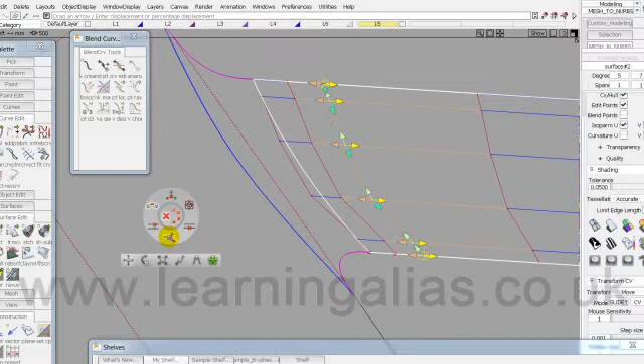Okay, now I want to put some acceleration in, so I'm going to pick CV and Hull, and perhaps a little bit of mouse sensitivity, about 25. There's two CVs there, so I'm going to pick them both and just ease them out. So I'm creating a bit of acceleration here. And how do I know how much acceleration I need? Well, I'm looking at this blend curve here.

You always want the peak of the blend to be in the center of the blend. So if I go like to there, obviously the peak is down here now. And you can see that I'm losing tangency there, so I have to correct that in a moment.

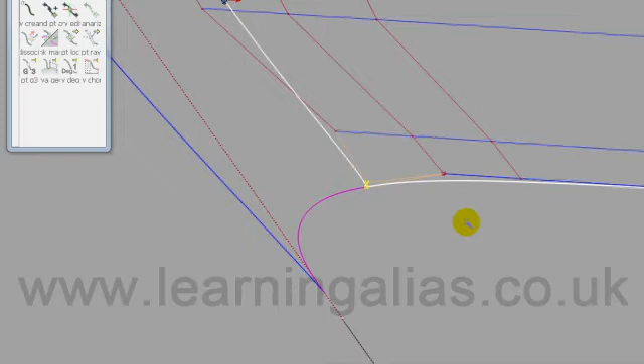So I think that's about it. That's about what I need. And I need something here. Shift E.

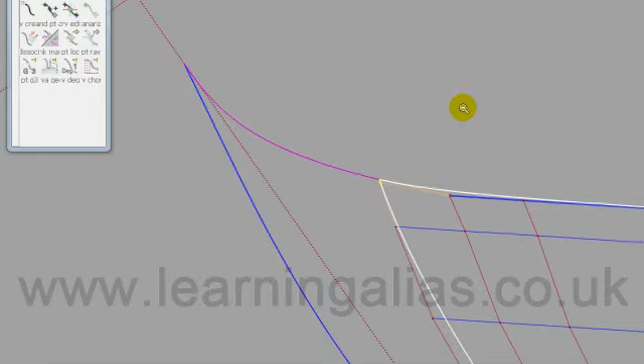So I'm looking for a nice line through there for my blend. That encourages the blend to build in the right direction and not sink in.

So I'm going to go into F8, and I want a little tiny bit of, I'm going to put some shading on so that you can see a little bit better what we're working on.

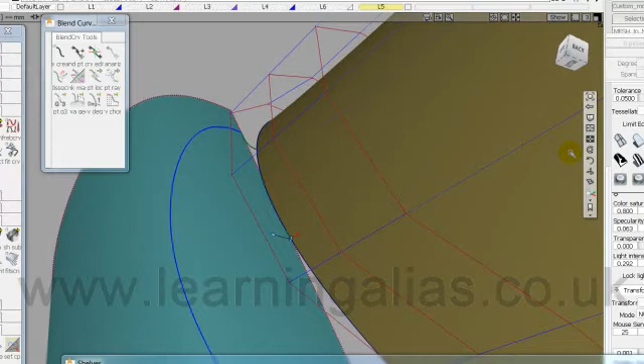And I'm going to come out of perspective just for a moment. It's easier to move the model around with some control.

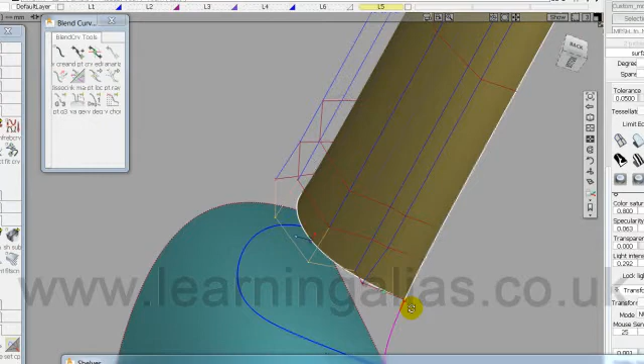So I've moved those two CVs, so it's this one here now that I want to move. Just a tiny little bit, not too far. And these at the side, just a tiny little bit. And that one there you can see is now tucked inside, and I'm looking down here to kind of get a nice smooth progression on my CVs.

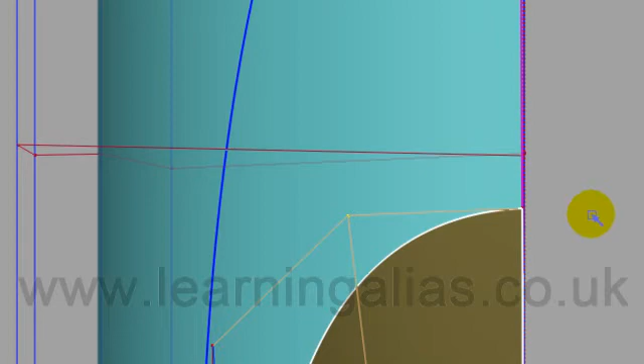I want to go back now and check the tangency at this point here and toggle set the construction plane, go into F5. So we pick this CV, hold down the control key, come over here and right click to adjust the tangency. You can work in two views if you want, but because I'm filming I have quite a small screen, so I'm sticking to one view.

I think that the gap here may be a bit larger than we need to build a good blend. So what I'm going to do now is pick the surface and just simply move that in very, very carefully. And we don't have to worry about the blend curves because they update. If you are unable to move that because it's a critical part and you don't want to change its position, then obviously you have to use the extend with merge on there.

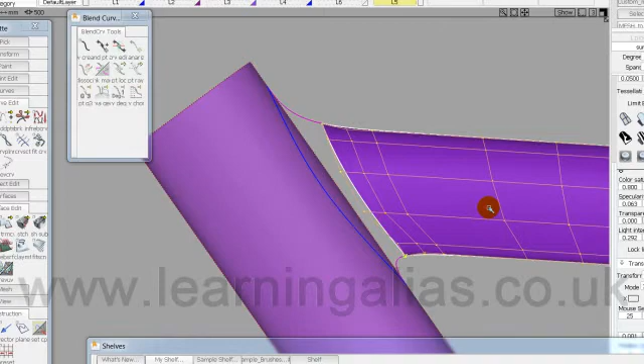I'm going to try that, and if it doesn't build properly we can move it out again, it's no problem. And I want to check for curvature now.

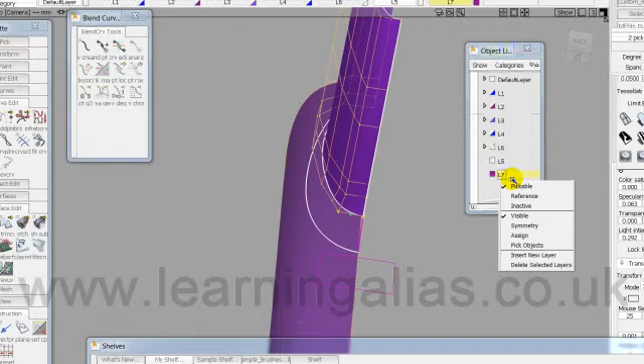So what I'm going to do is assign these two surfaces to a layer, Control L for a new layer. This colour here signifies to me that it's a surface, and royal blue signifies to me that it's curves, and then obviously when I've got more time I put the name on the layers. Turn on layer symmetry, and we're going to check now to see if we've got any continuity.

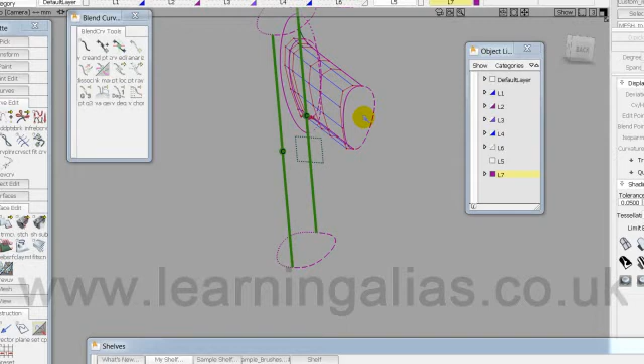Okay, we've got mixed results there. We've got curvature on that surface, so what I'm going to do now is hide unselected. So E on the keyboard, pick nothing, pick the surface, and then Shift H, which will hide unselected.

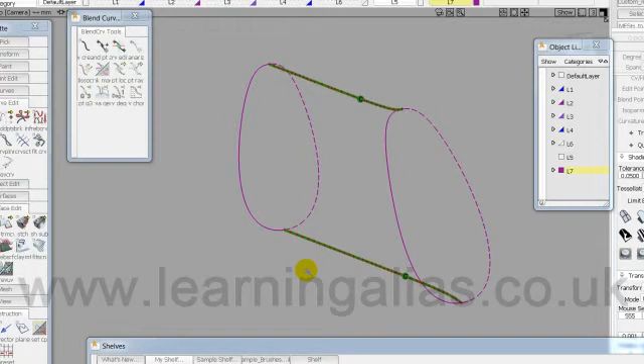The reason I'm going for curvature here now is so that once I've built the blend I don't have to mess around with this anymore, because if I do, once I've got the blend in place, the blend's got direct history and uses a lot of processor each time you move anything related to the blend.

So let's evaluate this. We'll put on some showroom, which is just the first quick look, make sure it looks alright. You see the lead-in that we've created there? It's not so much here, and it's more and more as we get there. In fact, it looks like too much there.

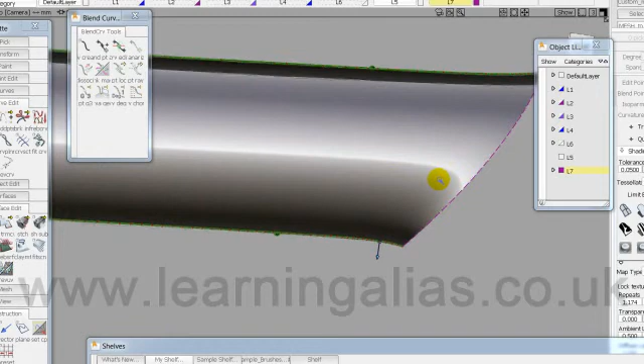Apart from that, it looks okay. I'm going to delete the locator. I can just hit G on my keyboard, which toggles the locator off, and hit G again to toggle it back on, so that's a useful hotkey. I'm going to toggle the model so I can better see the shading. It looks very good, doesn't it?

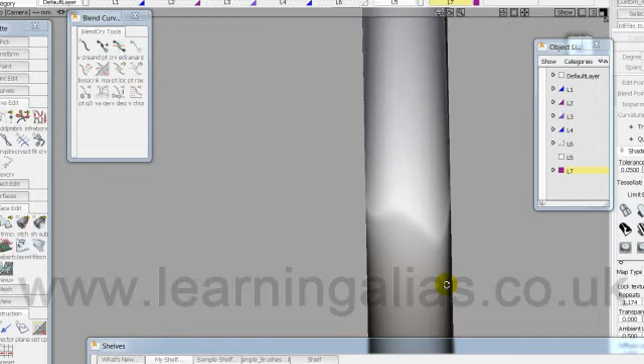But let's just check it with the all-telling zebra. Yeah, that's fine, we've got curvature there. Let's look at the other side, and we've got curvature there too. That's fine, okay, Control N to bring back the model.

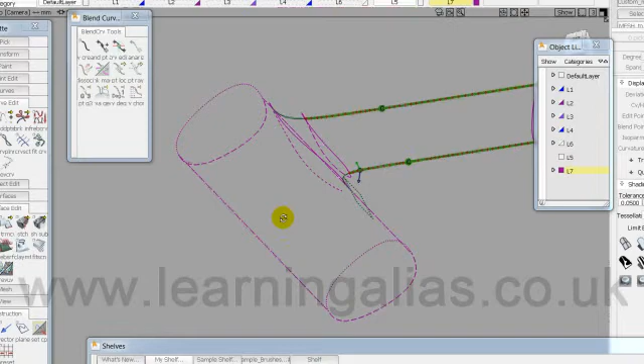And we're ready to build another blend now and see if things have improved. So I think what I'll do is trim this out here. Shift T. We'll turn off layer symmetry.

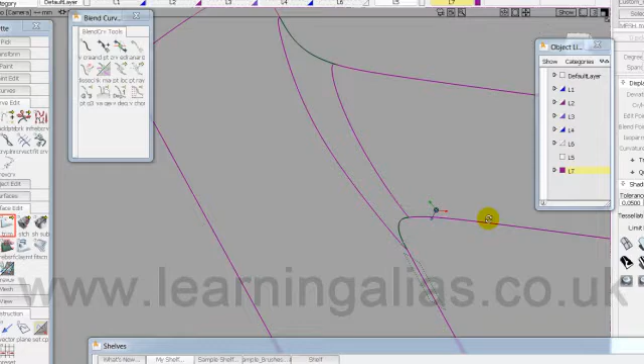Simplify the view, always simplify the view as much as you can. Now I'm not going to make another blend yet. What I'm going to do is put some more curves in. So let's do that, construction plane. We're going to use geometry. I know from experience that we need one around here to support this complicated area.

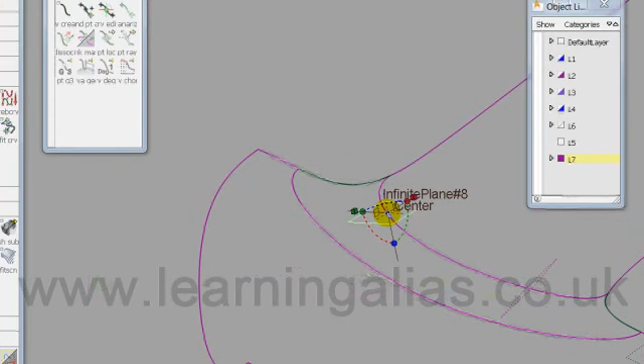Now what I like to do is get the plane like that so you're actually looking down the line of the plane, so you get the curve roughly planar before you start.

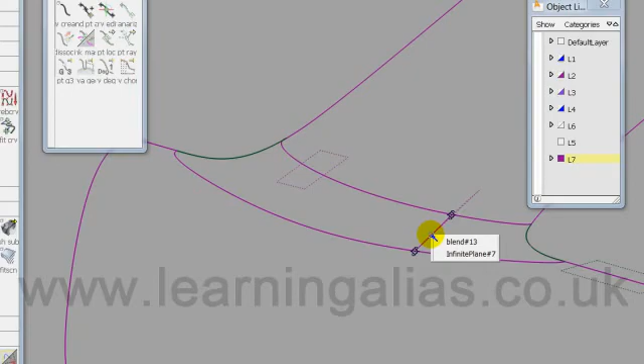I'll do it with my hotkeys, so it's Shift X. I'm going to pick the blend and the infinite plane, and then hit planarize, and you see it jump there. It also tells you at the top that it's been planarized successfully.

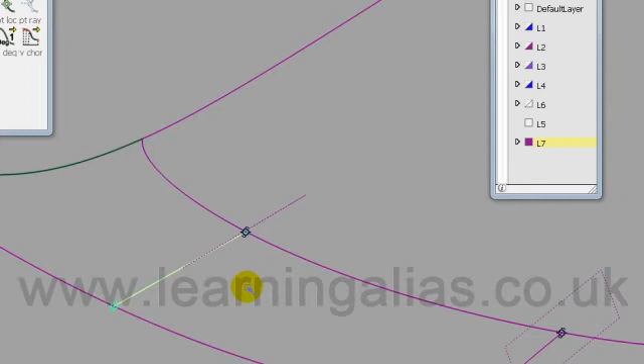Once I've done that, I'm going to put my blend points in the right place. Pick both entities and then hit planarize. That's it, simple, isn't it?

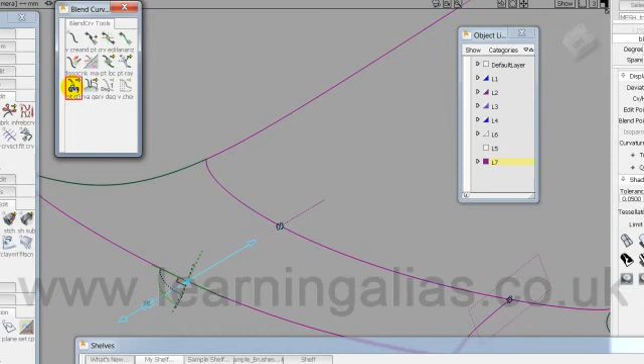Next job is to check that they are G3. And now we can build another profile blend. This time we've got 4 curves to support the blend instead of 2.

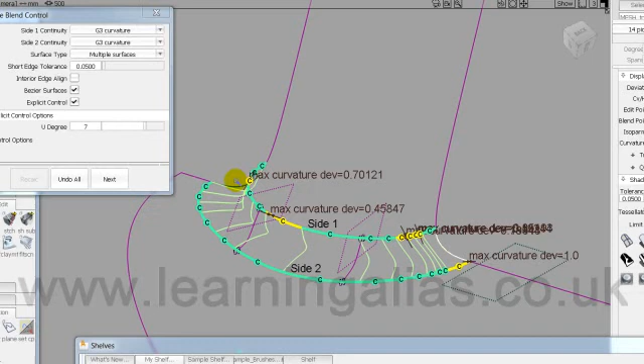Everything's set up correctly. Hit spacebar, and I'm going to pick the most difficult curve to get at first, which is that one, then this curve, and finally that one. Let's just turn our controls on, have a look what's going on.

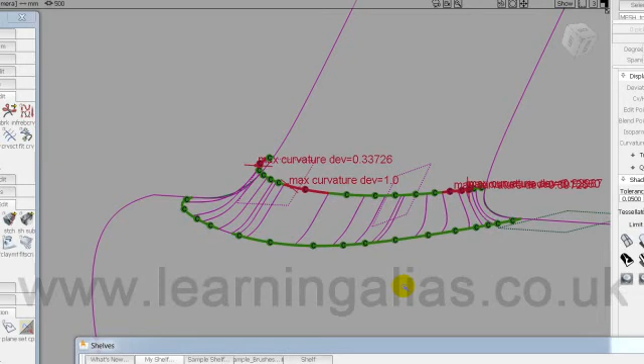I'm going to delete these. Obviously you'd direct model to get those, but for the moment I'm just going to delete the locators.

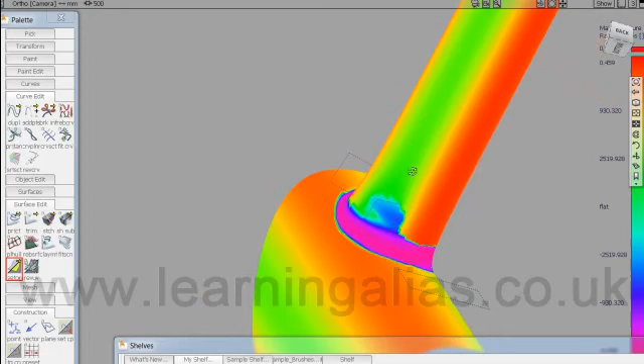Okay, with the evaluation shader on, we can see that we have some sort of a problem there, so I think we should address that now.

What I'm going to do is come up here to history and suspend rebuilds, and I'm going to come out of proportional mod, so I'm going to come back into using NUV.

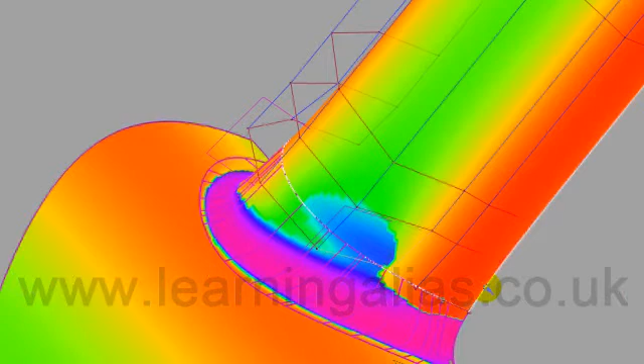Okay, so I've got that CV selected. I'm going to move it now. I've got a very fine mouse setting here, so I'm going to do it slowly, and I should pick that one as well.

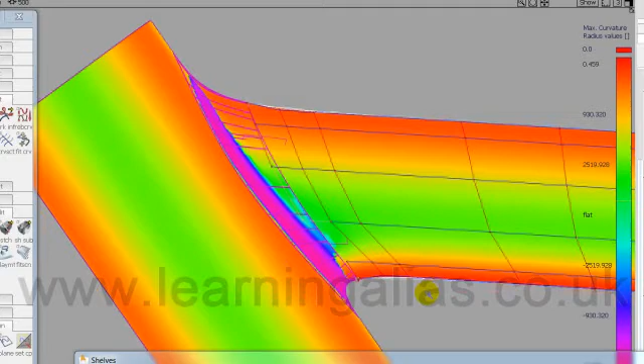You know, never in Alias, never try to do everything on one CV. I want to go into F6 now, get a better look at things, and that CV, look, see that's too high, so I'm going to slide that CV now before I do anything else.

And now move mouse sensitivity down to about 25 when you're sliding CVs around. Something like that, I think that's okay.

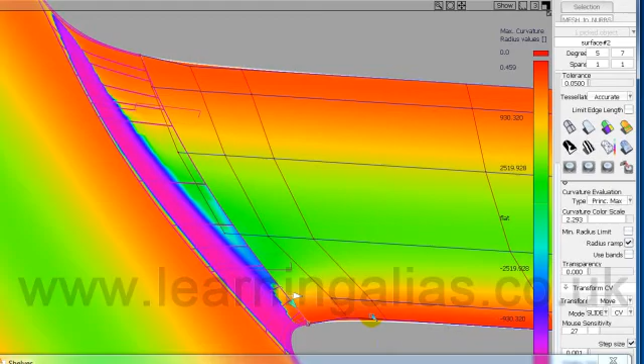So we've got nice coloration here with our shader, and you see that the coloration within the blend is completely different.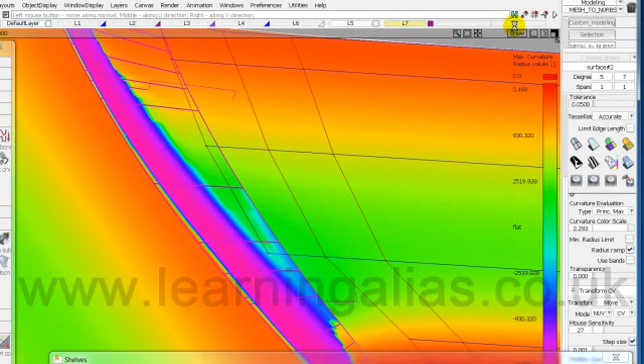So now what I'm going to do is come up here again and turn rebuild back on again, and we'll see that this will update. Looks a lot better, far more healthy.

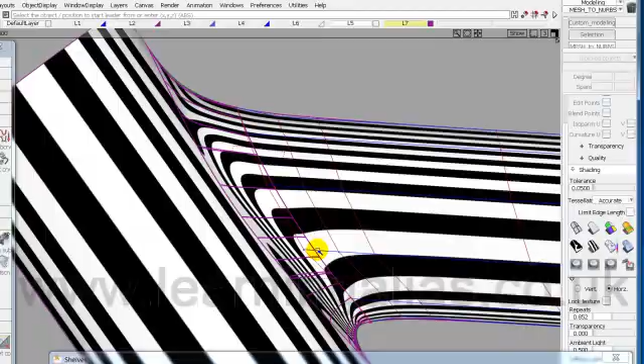So that's all looking very nice. This is really very typical G3 here. There's a slight problem there still.